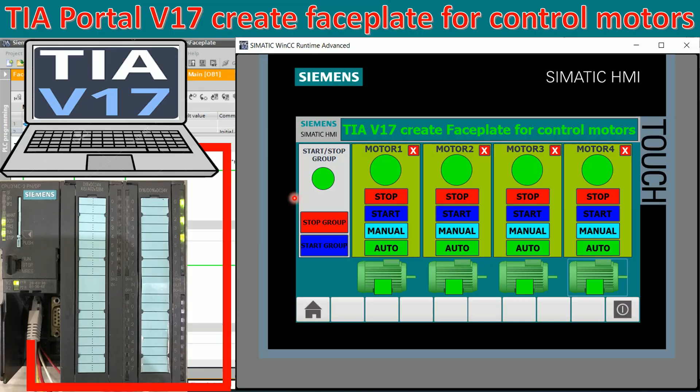Today we will learn how to create the faceplate for controlling motors using the PLC S7-300 CPU 314C2PN/DP.

So here is the faceplate that I already showed the highlight in the previous video. We can start and stop by manual mode one by one, and we also can start and stop the group, meaning start stop using the group.

For example, I push start. It means motor 1 will run, then after a delay, motor 2 will run, then after a delay motor 3 will run, and after that motor 4 will run.

And if we stop the group, motor 4 will stop, then motor 3 will stop, motor 2 will stop, and motor 1 will stop.

We can also select manual and auto mode one by one. If we select manual mode, this pop-up will not show.

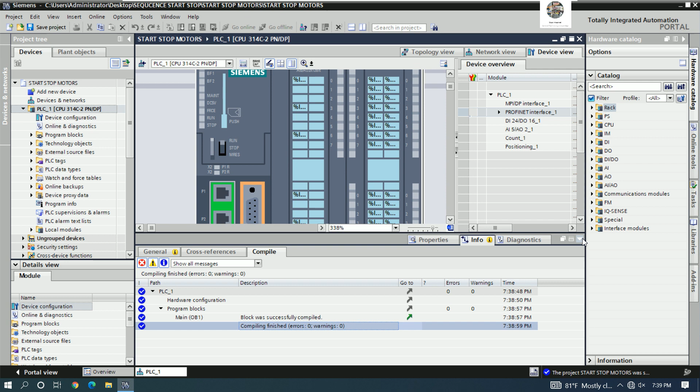Then we can download the hardware configuration to the CPU. I will compile the hardware configuration first before downloading. There is no error, so then we can download it. I will push download to device.

Then choose the Ethernet driver - my Ethernet driver is Intel 82574L gigabit - and then we can push start search to search all devices. It will automatically detect one device.

That device has IP address 192.168.0.1, and then we can click load to load the hardware configuration to the CPU. I will stop all to stop the CPU, and then start the CPU after downloading. Right now the CPU is running.

CPU was started, and now we can go back to our slide. So we need 4 motors: motor 1, motor 2, motor 3, and motor 4. The platform for each motor is the same.

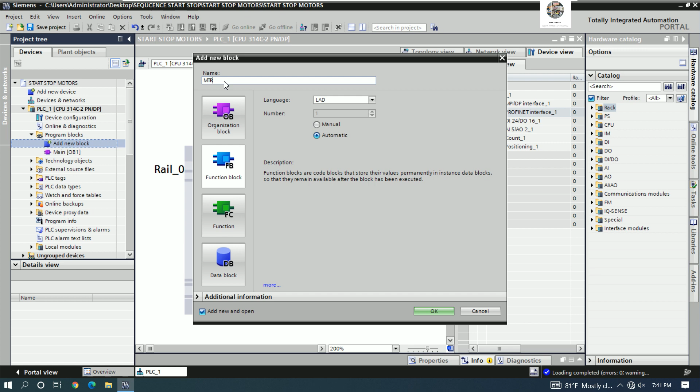For example, I will name it MTRBLK, meaning motor block - MTRBLK, motor block. And then I will choose the ladder language and choose function block, FB, and then click OK.

Okay, we will get the new block here, FB1. And then we need to assign the parameter to the block, right? So we have start, stop, manual, and auto mode, right? So I will assign the input with start. It is the boolean, right? And start command.

Yes, after that, stop. Boolean also, stop command. After that, we have auto and manual mode, right? So I will use only one bit or one point with the auto manual mode.

Then I will use mode select. Yes, mode select. And when mode select, it means that when 1, we have 0 and 1, right? 1, it means auto, and 0, it means manual. 1 auto mode, 0 manual mode. Yes.

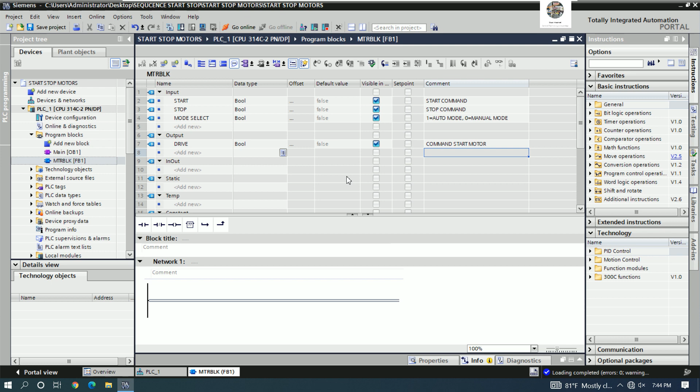Okay, so we have 3 inputs and 1 output. Yes. Then we can create the block interlocking. Yes.

So first I will check the auto and manual mode first. So this one mode manual. So manual mode is 0, right? So I will use NC for manual mode. So when not select, it means manual mode.

Then we can start. Oh, we need to put one more command, right? For start auto. Yes, start auto, so command start auto.

Okay, so we will go back to our network. I will select manual mode and then we can start. And I will put the button stop here and then we can stop. And the output will be drive, right? So I will use output for drive. And I will hold the signal.

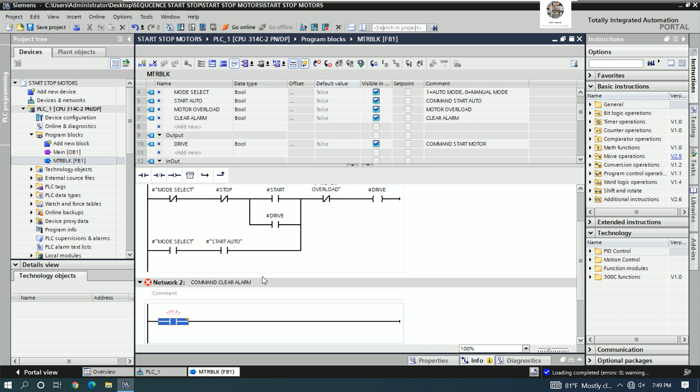So when motor overload, then I will use one more for motor alarm. For output motor alarm. Yes. So I will set the motor alarm. Motor alarm here, and then here I will use motor alarm, yes, to cut off the motor, and then we need to reset the alarm, right?

When the motor is cool, yes, then we need to reset the alarm before we can run. So I will use the reset alarm, and then reset the bit motor alarm. Okay.

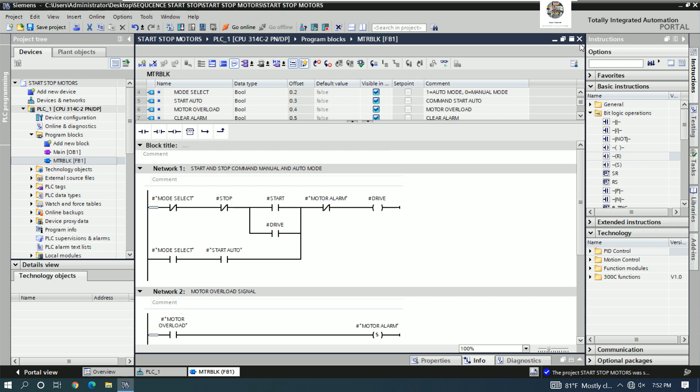So that's all. We can save the project and then compile the block. Okay, so there is no error. Then we can close. And then we can close also. And go to main OB1.

So this one for motor number 1, right? So motor, motor 1 control. Okay, then we can drag and drop here, drag and drop the FB1 to the network, and then we can put motor 1. Yes, it will automatically create the database data block. Yes.

Okay, so instance DB1, and then we have start, stop, mode select, start auto, motor overload, and command clear alarm, right? And we have two outputs. The first one is drive, the second one is motor alarm. Okay, and then

we can put the address, example M0.0 for start manual, M0.1 for stop manual, M0.3 for selection, M0.4 for command start auto. Motor overload, I will use I, right? So let's go to check the I. Go to device configuration to check the input. Yes, here.

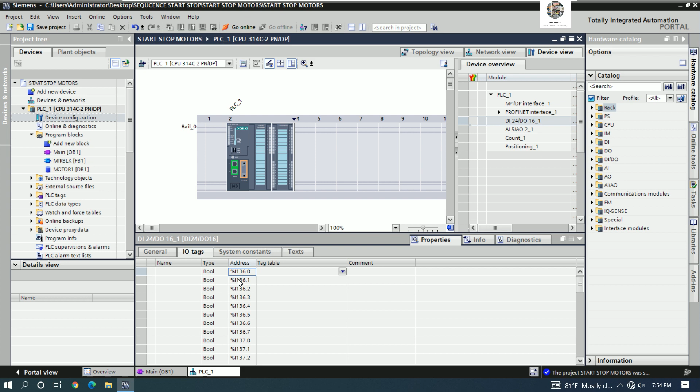IO address, it will start from I136.0, right? So I will mark as motor 1 overload, motor 2 overload, motor 3 overload, motor 4 overload.

Okay, and then for the output we can also remark, yes, here. Example: motor 1 drive, motor 2 drive, motor 3 drive, motor 4 drive, and then motor 1 overload or motor 1 alarm, motor 2 alarm, motor 3 alarm, motor 4 alarm. Yes, then we can compile.

Okay, and we go back to main OB1 again. So this one I will use motor 1 overload. Yes, motor 1 overload. Here it will link automatically because we already created the symbol name, right? And for clear alarm command, I will use M0.5. And this one I can use motor 1 drive. And this one I can use motor 1 alarm. Yes.

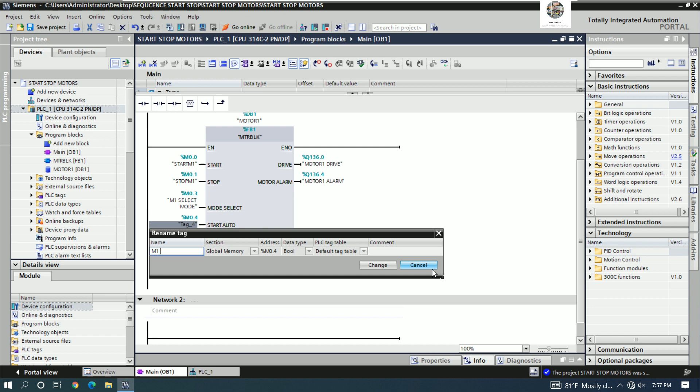And then this one we can rename as start M1. Stop M1. M1 selection, M1 select mode. This one M1 start auto. Okay, and then this one clear alarm M1. Yes, then we can save.

And totally we have 4 motors, right? So we can copy this one, motor number 2, and then we can drag and drop the block to the network, and then put the name motor 2. Yes. Okay, and then I will start from M0.6, M0.7, M1.0, M1.1, motor 2 overload.

Then this one M1.2, this one motor 2 drive, and this one motor 2 alarm. Yes, and then we can rename to be start M2, right? Start M2, stop M2, M2 select mode, M2 start auto, and this one clear alarm M2. Yes.

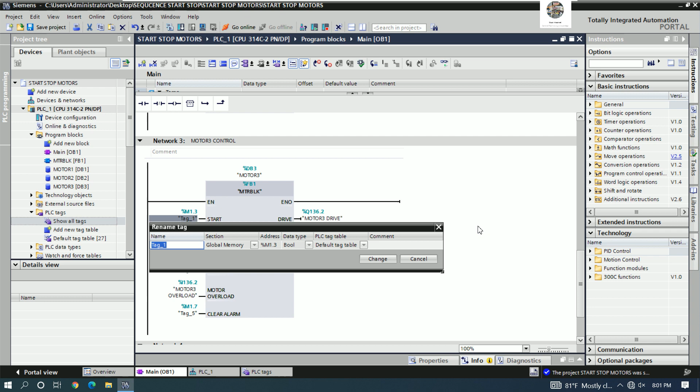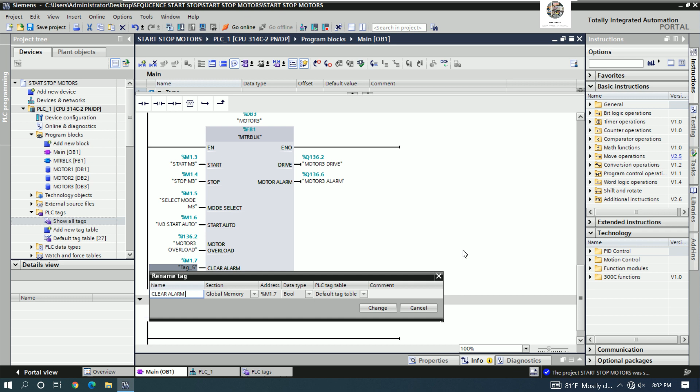So actually we can go to the PLC tags, and then we can also rename here. Example, we can rename here to be the same as the block. But here we can adjust and rename also. I will rename as start M3, stop M3, select mode M3, M3 start auto, and this one clear alarm M3. Yes. And the last one is motor number 4, right?

So we can copy again, paste, and change this one to 4. And then we can drag and drop the block again and put the name motor 4. And then I will start from M2.0, M2.1, M2.2, M2.3, this one motor 4 overload, and this one M2.4 motor 4 drive, and this one motor 4 alarm.

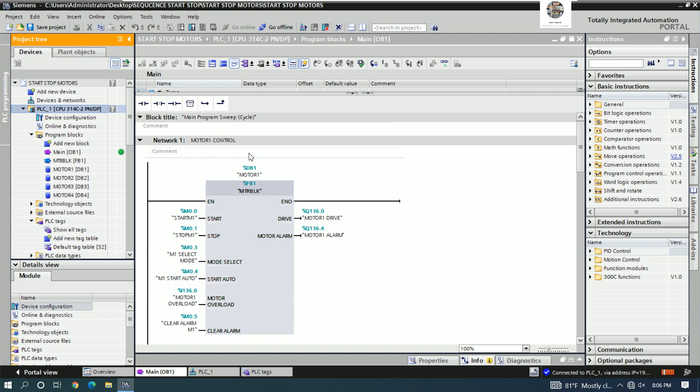And then we can go online to check the status. This one initial, right? I will modify to 0. Put this one to 1 to stop. Okay, so right now we already created the block. Then we go to create the faceplate. I will add a new device to create the HMI. Wait a moment to create the new HMI project, and then we can create the pop-up or faceplate together step by step. I will click finish.

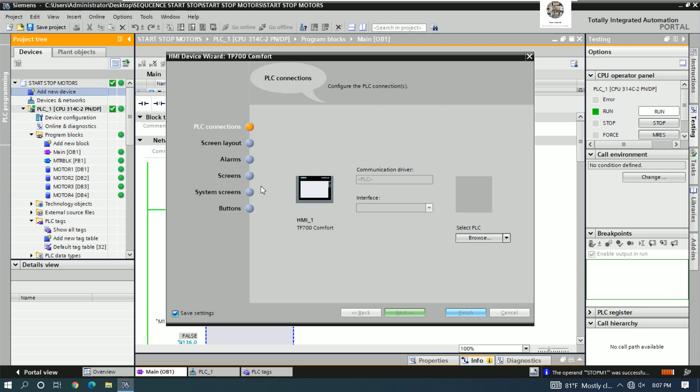Okay, the HMI project is creating. Then I will delete this one, this one, this one, and I will go offline first. After that we can go online again. So here we can change the background of the HMI, and then we have 4 motors, right? So first I will create the push buttons, or we can put a rectangle here, like this, and then we can insert the button.

So I will put start, and then copy for stop, and we have manual, and one more for auto mode, manual mode, and one more for clear alarm. Then I will extend the button like this. And we need to insert the motor, right? So I will insert the motor here.

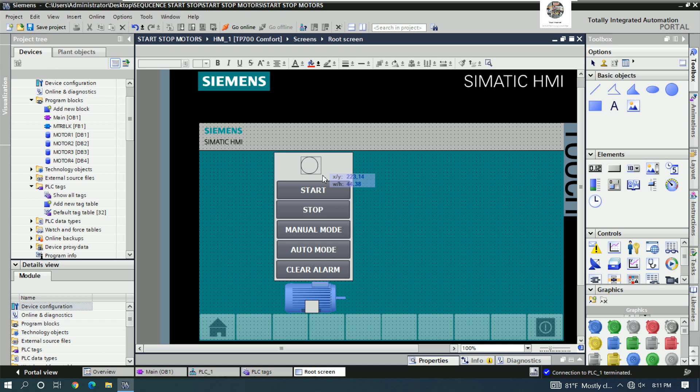And then we also show the status of the motor here. So we go to property and then change this one to be green. Sorry, red. This one should be red also. Yes. And then for the start button, I will select solid and then change to blue. And for the text, I will change to be black.

And for stop, I will change also to solid and then change to red, and this one should be black. For mode select, I will use this color. This one also, I will choose this color. Yes. And for command clear alarm, I will use this color. Okay.

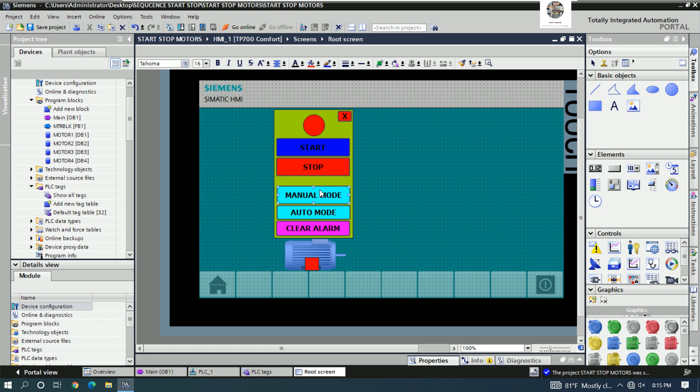And then we need to put the name of the motor, right? So the name of the motor I will put here. Motor 1, motor 2. Okay, maybe I will adjust this button to be smaller, because the space is very small, right? Okay, maybe like this is okay. Then I will put the name of the motor to be motor 1. Okay, motor 1 here.

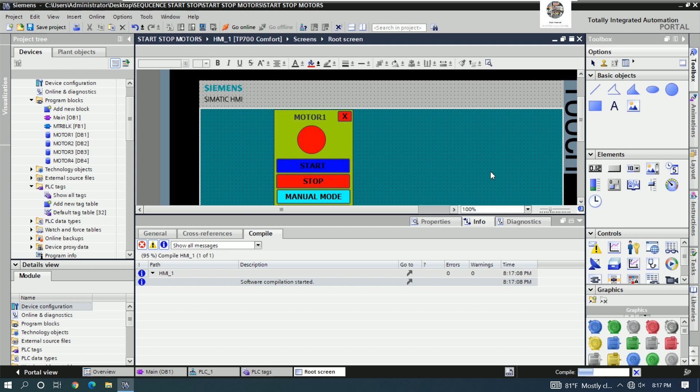Then we can adjust the layout. Align to be center, yes. And then here we can adjust to be bigger. Okay, so for the screen we can design another style that we want, yes. So I will focus only on configuration for the push button and HMI, yes. Okay, like this. Then we can simulate to check the screen a little bit, if it's okay or not. Okay, so that's good for push buttons and for the screen, yes.

And the concept is when we click here, it needs to show this pop up, right? So I will use one more button, yes, and then put like this, and then I will delete this one, yes. Okay, and then go to property and then go to fill and then choose transparent, yes. When we put like this, it means that here, yes. So here we can also adjust to 0, yes.

And for this one, actually we can adjust to be a little bit bigger than the motor. This one I will choose 0, yes. Okay, so we can set up only one motor for test first, yes. Okay, so let's go to create the tag, HMI tag.

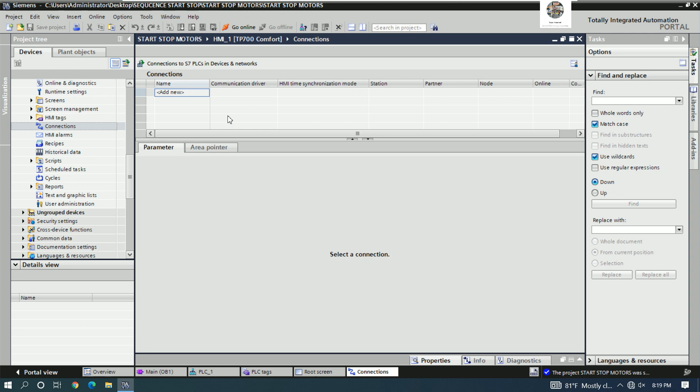But before going to create the HMI tag, let's create the connection. PLC 1, and choose the driver as S7-300/400 station, and then choose Ethernet, and for the IP address 192.168.0.253, 192.168.0.1. It is the IP address of the PLC, and here is the IP address of my PC. We can also check IP config, yes, 192.168.0.253, and then go to HMI tag, yes.

Then we can create the tag. So we have motor 1, start M1, stop M1, yes. Actually we can copy and paste from here, yes. So let's copy and then paste. Copy. And then we can also create one by one. Okay, let's create one by one.

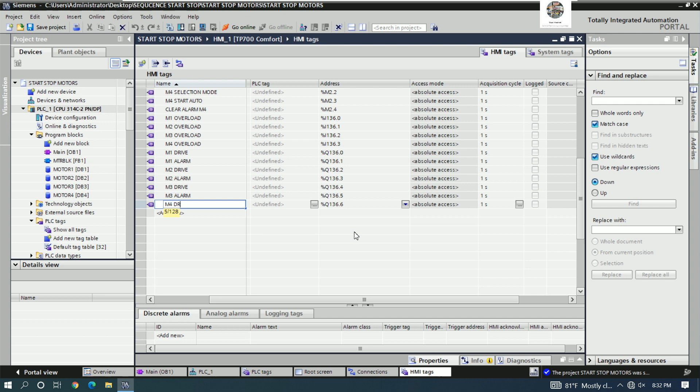Q136.0, M1 drive, M1 alarm. Yes, so M1 drive will start from Q136.0, M1 alarm, M2 drive, M2 alarm, M3 drive, M3 alarm, M4 drive, M4 alarm. Yes, so until Q136.7, right? So let's check to confirm. Yes, so that's correct,

and then we can save and compile. Okay, there is no error, right? Then we can go to create the faceplate. Yes, go to our screen and then go to configure the button. So the first one I will configure the start button, so right click and then go to events, go to press, and I will choose the set bit while key pressed.

Okay, so we will configure the start button by using the set bit while key pressed, and then we can drag and drop the tag for start M1 here. Yes, and for the stop we also use the press and then choose the set bit while key pressed and then choose the stop M1. Yes, and for the manual and auto mode, it means that we can select, right?

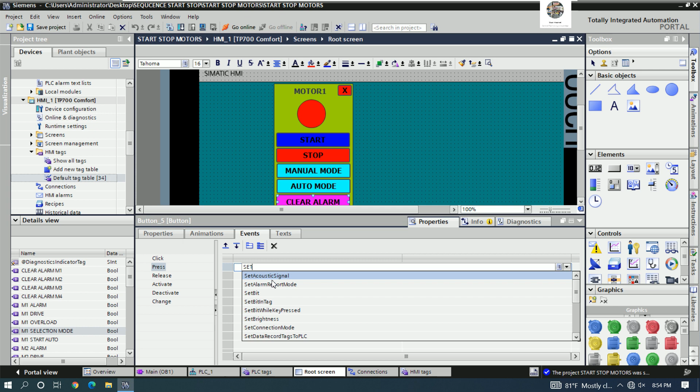And then for this mode we can also choose the color appearance, and then when condition 0 I will change to green. Yes, and then clear the alarm, right? To clear the alarm, we can use the event and then choose press, so set bit while key pressed and then clear alarm M1. Yes,

and we need to show the status of motor 1. So we can go to color animation, insert the new appearance, and then go to M1 drive. Choose the condition 1 and change the color to be green, and this one also. So the normal condition is red, so I will choose the color animation, change M1 drive to 1 and then change to the green color. Yes, and for this object I will put the same position.

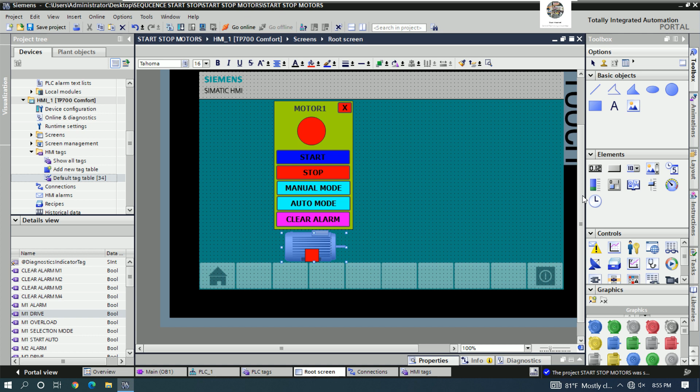So that's all, and then we can configure this one later, so we can simulate first. So I will go online with this one and then go to OB1, online. Yes, and we can simulate here. Okay, so here is the mode, sorry, manual mode, right? So we can start the motor.

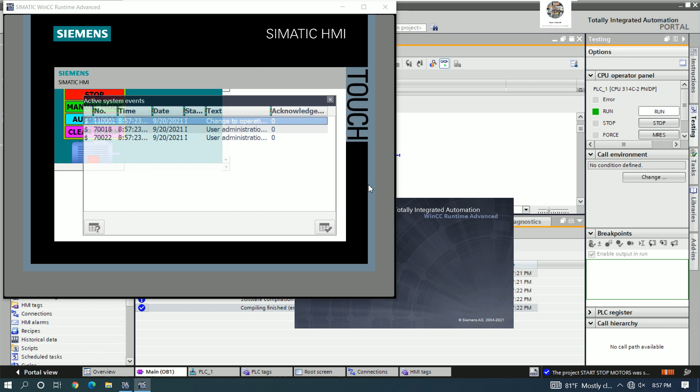We need to set the PG/PC interface. So I will go to control panel and then go to set the PG/PC interface. Go to S7 online Step 7 and then choose the correct driver that we already connected, right? And then let's simulate again. Okay, the connection is working. Then we can select and see the condition together before going to step 2. So mode manual, mode auto, mode manual.

Oh, this one should be reset, right? So we can go to change the screen selection. For this one we can go to events and then choose the press and then choose the reset bit, M1 selection mode, yes. Then we can save and then simulate again.

Okay, and then go to OB1 again to see the condition. Okay, I will try to select again. Let's see this one. Yeah, fault. So we can start the motor. Yes, motor is running, so the condition will change to green. I will stop the motor, start again, stop again. Yes, auto mode. Yes, let's see, this bit works.

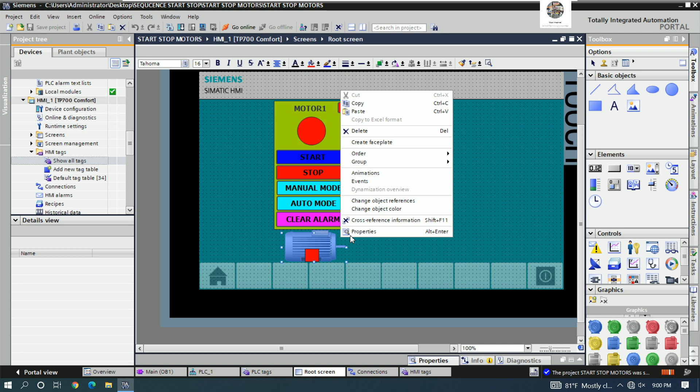And then let's go back to our screen to configure the clear alarm, right? So clear alarm we already set, right? Okay, and we need to configure this one. When we don't click this one, it will not pop up, right? So we can go to events, go to press,

and then go to set bit, and then we can create the new internal tag. Yes, I will add a new tag. Example, tag name M1. Yes, and choose the boolean here. Yes, so the internal tag is M1.

Then I will configure this one. Go to events, then go to press. I will reset bit M1. Yes, and for all of this pop-up page, I will show it only when I press this area, right? Press the M1 area. So we can hide it, yeah, by using the animation.

Go to add new animations, go to visibility, and then we can choose tag M1 that we already created as an internal tag, and choose the range from 0 to 0, and then use invisible. Yes, so we can change all the same. Yes, go to animation, add new visibility, choose M1, and then change from 0 to 0, invisible.

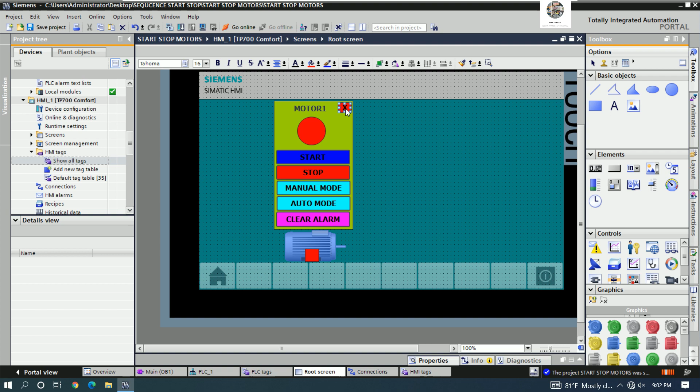This one also. Go to property, add new visibility, M1, 0 to 0, invisible. Yes, this one also. Add new visibility, M1, 0 to 0, invisible. Yes, we can do the same procedure. From 0 to 0. M1 from 0 to 0. We don't need to show the status, right? M2, sorry, M1.

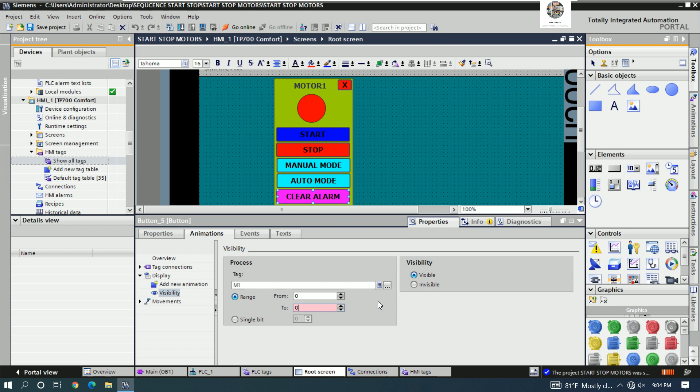This button also, create the new visibility M1, change to 0, invisible. Visibility M1 from 0 to 0, invisible. Yes, so that's all. Then we can test the screen again, simulation.

So let's see, it doesn't show the status, right? So when I push here, yeah, it will show, and click here, close. Yes, and then we can start, stop, yeah, auto, manual mode, yes, clear the alarm, yes, start, and then we can close. Okay, so we can do the same from motor 1 to motor 2, motor 3, and motor 4.

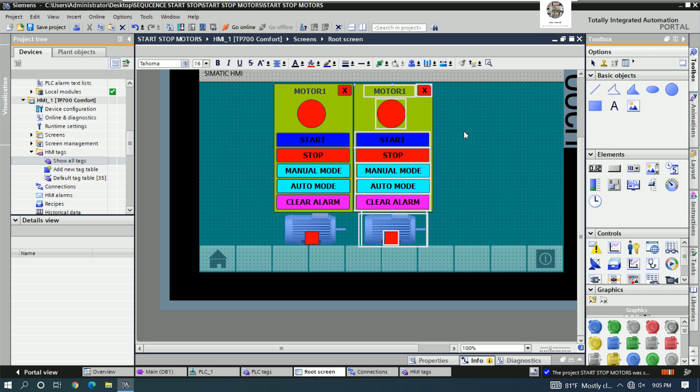Yes, so this one is very easy, we can copy. Okay, right click, copy, right click, paste, and we can drag and drop. Yes, and we can right click, paste, and one more, right click and paste, right? Maybe we can zoom a little bit. Maybe delete this one first, then we can drag and drop. We can adjust like this. So we need to put the place for the start stop group also, right? So I will copy again, or we can paste again.

Okay, and then we can adjust a little bit more. Multi-selection, yes. Okay, like this. We'll adjust a little bit for the rectangle. Okay, maybe like this, okay, right?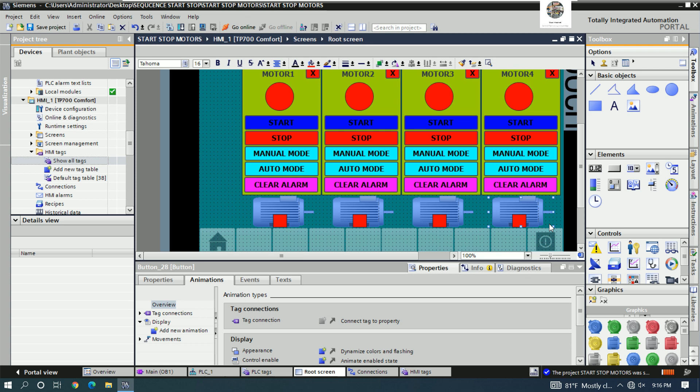Okay. Then go to the top. This one visibility should be changed to M4. And this one should go to M4. Events, change to M4. For this one, we already changed, right? Okay, and then we can change the background to be M4. The status I will change to M4 also. Event, no event, right? But color animation we have appearance also. Change to M4 drive. Yes. This one M3, M2, M1, right? Okay, that's correct.

And then we can go to start button, visibility, change to M4, events, start M4, right? Stop also stop M4. For animation, we can change this one to M4. Manual mode, we can change to M4. For the appearance, we also change to M4 selection. And event, we can go and then change this one to M4. For auto mode, change this one to M4. And then change the color animation to be M4. Visibility, change to M4 also.

This one does not work, right? Oh, this one is confused. So we can go to check the events again for motor M2. Start M2, go to events. Start M2. Stop M2. That's correct, right? So we can go to check on the OB1. Yes. Why does it not work? Motor M2. Motor M2 is already on, right? But the condition is not on. So we need to check the color animation. I will try to stop. It stops. Start again. It starts, right?

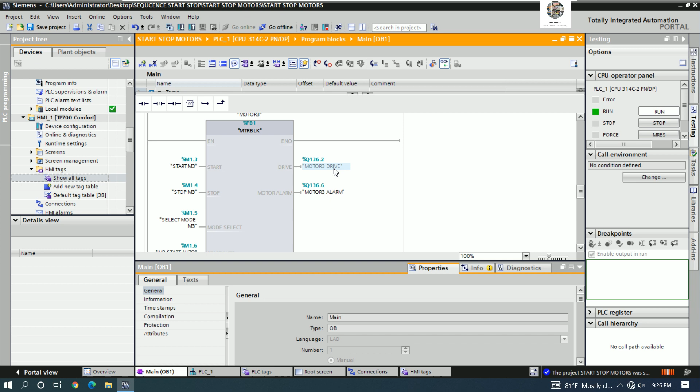So let's check Q136.1. Yes. Go to root screen, then check the color animation. This one should be changed to M2 drive, right? M2 drive already created, but we need to see the tag, right? M2 drive. This one. Oh, M2 drive, the address is not correct, right? M1 drive 136.0, 136.1 M2 drive. Okay, let's check the address again. Q2, this one. Motor 2, right? Q136.1. Okay, let's check the HMI tag.

This one should be .1, right? M1 drive .0, M2 drive .1, M3 drive .2, M4 drive .3, M1 alarm .4, right? Yes, here Q136.4. Sorry, I confused here. So this one .4, M2 alarm .5, M3 alarm .6, M4 alarm .7, right?

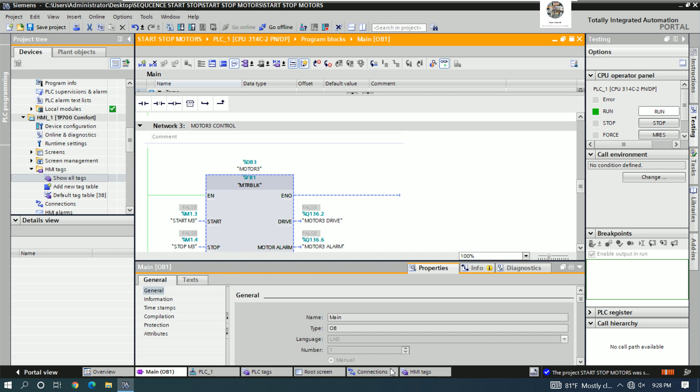M4 alarm .7, M3 alarm .6. Okay, so .0, .1, .2, .4, .5, .6, .7. Okay, that's correct. And then we can simulate again. So let's go check motor 2 again, right here. Okay, the condition is okay because I corrected the address. Yes, sorry. Then we can start M3, M4 also start, right? Then we can stop one by one. And let's see the output on the PLC is working. I will show the status on the PLC when I push the control on the HMI.

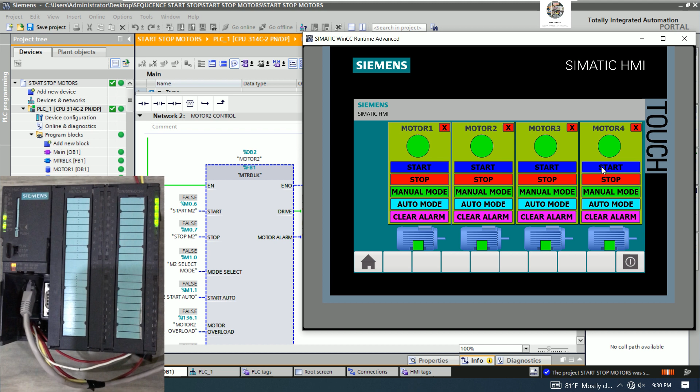So this is just manual mode. Then we can create the auto mode. I will close the simulation and go offline first, and then we can create the automatic mode, when we start the group. When we start the group, the motor will start step by step, from motor 1 to motor 4, and when stop, from motor 4 to motor 1.

I will go to the root screen and put the title here. Change the color, go to property, I will change this color, insert the text, create TIA Portal version 17, create FB, function block for control motors, control for motors, and then we can go to layout and check this one, and I will change the color to be yellow like this.

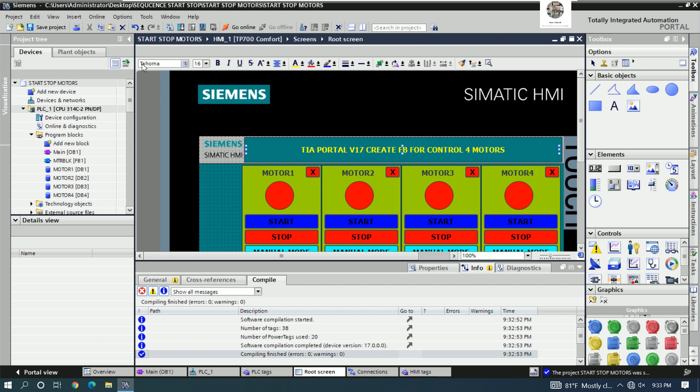Then okay, I will stop the motor first. I will stop first. Maybe I will put this one to be 17.

So we will create the group for start and stop, right? Okay, I will create the new network. Create the group start and stop for all motors, step by step.

So for the group, we need to select all the motors to be automatic mode. I will choose the NO for 4 motors, and then one command for automatic mode selection. So first I will copy from this one, yeah, we can copy and then paste here. This one also copy and paste here, we need to AND, right? Because we have 4 motors. So if we would like to start with the group, we must select all the motors to be automatic mode.

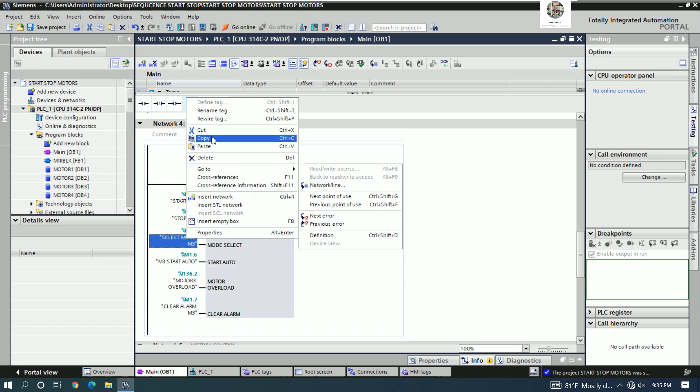So I will copy, paste, and also copy, paste. So motor 1, motor 2, motor 3, motor 4, all must be selected to auto mode. And then I will generate M10.0 - this one for automatic mode selection, right? All motors auto.

Post auto select. After that, we need to create the button for start and stop group, right? So I will add a new network. This one should be group selection.

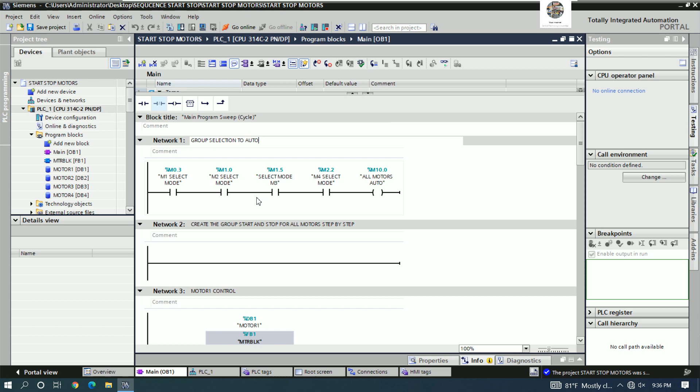Group selection to automatic mode. And then I will create more for stop and start the group, right?

So when all motors select to automatic mode, I will copy and then paste here, and then I have start group, example M10.1, M10.2, M10.3. Then I have stop group. And I have also start group.

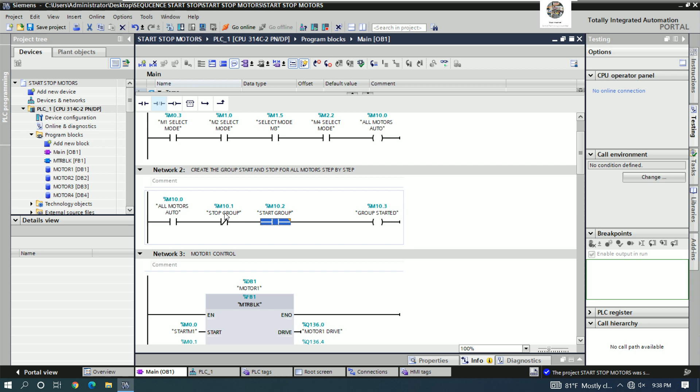And then I have group started. And I will hold the signal when group started. Sorry, I will choose this one. And then I will hold the signal when group was started. So copy and then paste.

And when group was started, I need to start motor M1. So I will delay a little bit when group started, because we need to connect to the alarm - the siren - yeah, to let the human know the group is running, the machine is running. So I can insert one for timer.

So when group is running, I will insert - copy and then paste, and I will insert the timer. So TON, and example timer 1. I will delay around 5 seconds, so T-sharp 5 seconds.

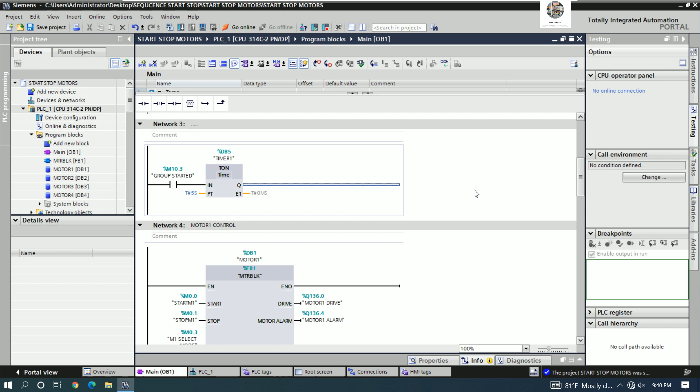So I will turn on. Turn on M10.4. And then insert one more network.

So when M10.4 is on, I will hold the signal. Yes, I will hold the signal. So I need to put M10.5 for hold the signal.

And then actually we can copy from here for start auto. Yes, we can copy from here and paste here, or we can paste here. So when timer is turned on, this one is turned on, this one is turned on also, and then copy this one to paste here, sorry, paste here for motor 1.

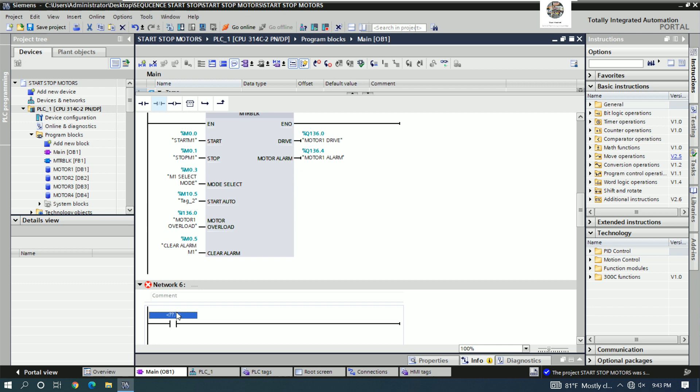And for motor number 2 I will insert one more network, and then I can use command from here, but it should be select to manual first, sorry, auto mode first, right? Okay, then I can use one more and then interlock with the group selection. Yes, so copy and then paste here.

And I need to hold the signal also, sorry, this one is turned on, then I will let the timer, yes, I will let the timer be turned on.

This one we can put the timer, right? Okay, I will hold the signal. I will put the timer 2, right? Sorry, TON, timer 2.

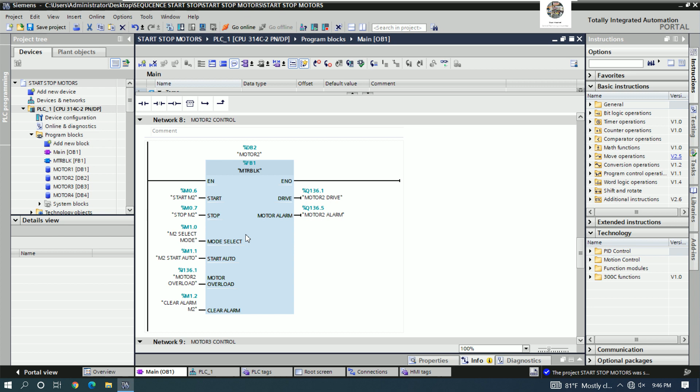This one also, and then I will hold the signal, hold by this bit, right? Okay, so this one I will change, yeah, copy and then change this one to be start auto, right? M2, and we can do the same as procedure.

Insert the network, and then yes, auto mode selection, right? So copy and paste, and also use command from here, right? So insert and then copy and paste, yes.

And we need to turn on the timer, right? So let me turn on the timer. So TON and then timer 3. I will delay 10 seconds also, yes.

Okay, and then this one I will use command from here, copy and paste, and we need to insert one more network, yes. So this one turn on, then I will turn on this one and choose one more for M10.7, right? So M10.7.

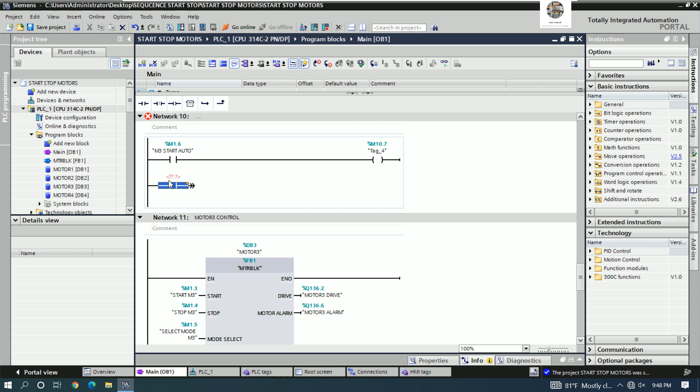And then I will hold the signal also, yes. Hold the signal, copy and paste, and then I will paste here also, yes. Okay, so this one will start motor 3, and for motor 3 I will insert one more network and then copy.

From here, automatic selection, paste here, and then insert here, insert command from motor 3.

And then turn on the power, turn on the timer, TON, timer 4, yes, this one timer 3, right? And this one timer 4, then delay time 10 seconds also.

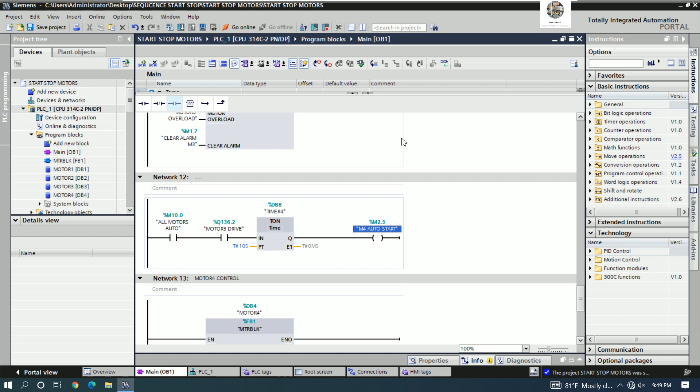And I will turn on this one, copy this one, and then I will insert one more network for hold the signal, right?

Hold the signal by this one. So this one I will choose M11.0, right? M11.0. This one also M11.0 because it holds the signal, right?

And then we can copy from M11.0 to control the start auto for motor 4. Yes. So that's all for group start.

Then we can test for group start first. Okay, so first we need to show the status of group selection, and then we need to create the HMI for group stop and group start, right? Okay, so I will download the logic to the PLC first.

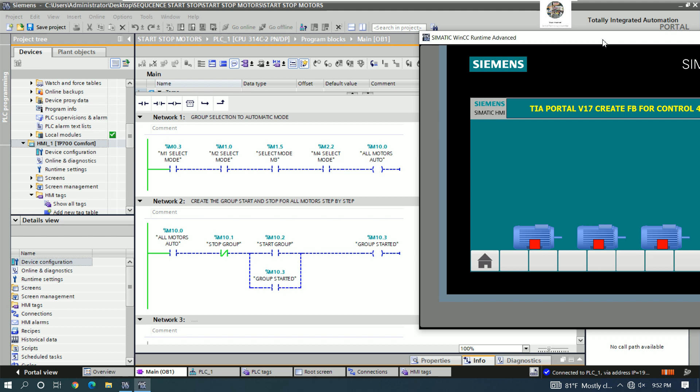Okay, we can select one by one to automatic mode. And let's see, this bit will turn on, right? I will select to automatic mode. Yes, yes, so we need to show the condition here. The mode selection is okay, right? Okay.

So we can go to create the HMI. So first let's go to the tags. We need to create more tags, right? So the first one is group status, group selection status, right? M10.0.

Group selected. I will use the PLC device, and then the address will start from M10.0, and change this one to 100 millisec.

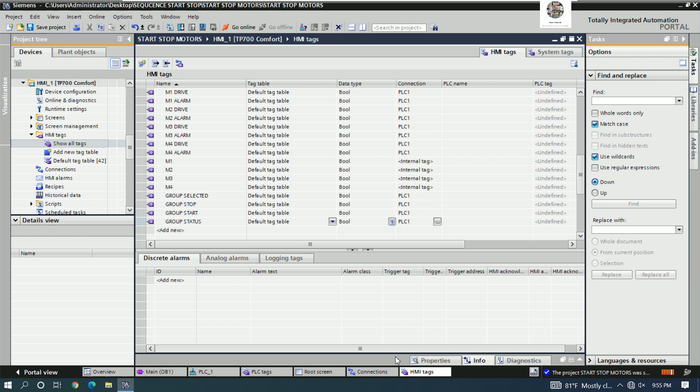Yes, then we can compile the tags. Okay, there is no error occurring, right? Then we can go to the root screen.

Then we can create more faceplate here. I will create with the small one for start and stop group. Yes. Because we have small space, right?

Okay, like this, and I will change the color to be, go to property, go to appearance, change to this color, and then we can copy from here, paste, to close the faceplate or close the pop-up, right? And then I will choose the button for stop.

And then copy for start. So we have start and stop, right, for group. Actually we can put like this, the same as this one, and then we can adjust. Okay, so this one should be start.

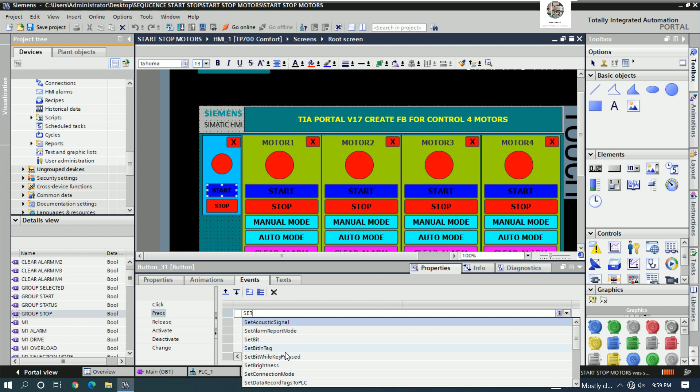And for start group start I will insert the function also. So SetBitWhileKeyPressed and choose the group start, sorry, this one.

And for group status I will go to animation, new color animation, choose appearance, and then group status, and I will change to, when status 1 I will change to green. Yes,

and we need to show only when all the motors are selected to auto mode, right? So we have group selection here. Yes, so this one I will configure with the color animation, go to new, and then choose visibility, right? And then go to group

selected from 0 to 0, and then choose invisible. This one also new, visibility group selected 0 to 0, invisible. This one also new, visibility, and then this one 0 to 0, invisible.

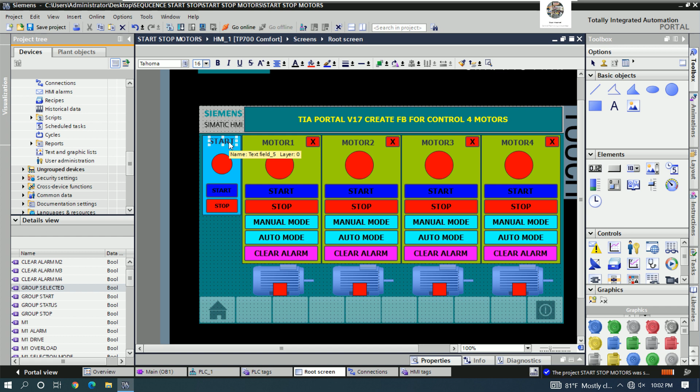So I will reset the bit. Normally we no need to close, right? This one no need to close, because when we select the manual mode, this one should be closed, right? Okay, no need. So I will put only start, stop group, right?

Can write group. Go to property, go to layout, and then uncheck this one. Change this one to center, and then I will adjust font to be 15. Then the color text we can change to be this color. Yes.

Then we can save, and we can simulate. Yes. Okay. Oh, this one should be hidden also, right? I will hide it. Okay. Go to color animation, and then go to new visibility, 0 to 0, invisible. Save again, and then simulate again. Yes.

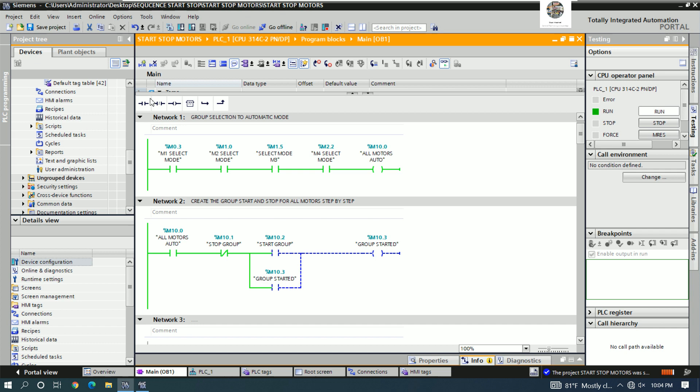Okay, let's start the group, and then we need to create the stop group also. Yes. So I will go to the OB1, and then simulate. Yes. Okay, so right now the group is ready to start, right? Because all the motors are already selected to auto mode.

So if I select one motor to manual mode, let's see, we cannot start, right? Because we already configured to hide the start group, since all motors must be selected to auto mode. Yes. So we try to select the auto mode, then group will pop up. Yeah. If one motor is selected to manual, we cannot start group, right? Okay.

So I will try to start the group. Yes, group is running. So wait timer for start motor number 1. Okay, motor number 1 is running. Wait for start motor number 2. Running for motor number 2. Wait timer for start motor number 3. Running.

Motor number 4 is running also, right? So for start group, we already put the correct function. Yes, let me try to select and configure for stop group. Yes.

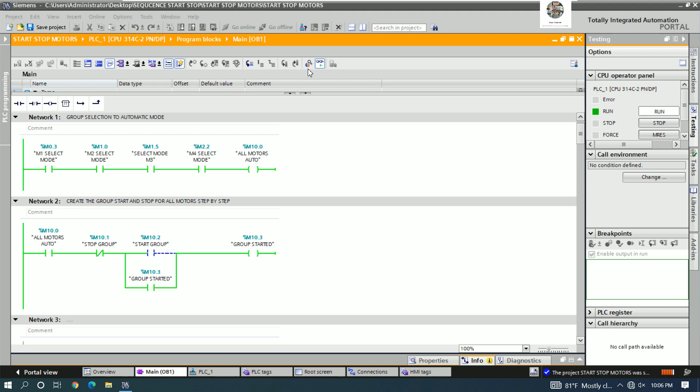So I will close first, and then we can go offline. Okay, so we will create the program for stop groups from motor 4 to motor 3 to motor 2 and to motor 1, right? So we can,

okay, I will comment this little bit for start motor 1 with auto mode. Yes, and this one we can copy and then paste here. Start motor 2 with automatic mode. This one start motor 3 with automatic mode, and this one start motor 4 for automatic mode, right? Then we need to create the stop group command, right?

Stop group command. Okay, so for stop group command we need to use this button, right? So I will copy. When we stop group, I will paste here and then change to normally open. So when stop group, I will set the coil, yes, set one coil. This is for command stop group.

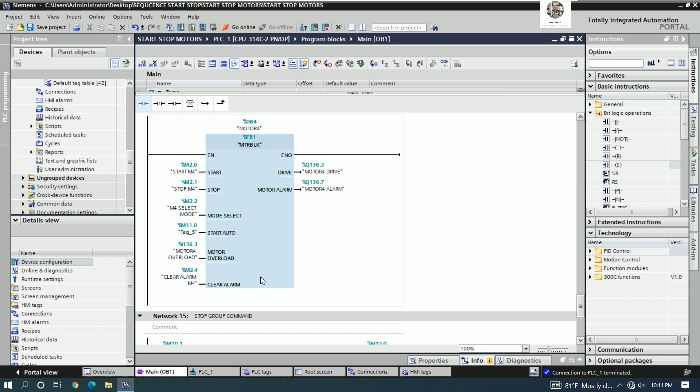And then I will use this one for hold the timer, right? So first, when we stop group, we need the timer a little bit more, right? Okay, I will use TON. So timer 5. Okay, I will delay time around 5 seconds also. So T sharp 5 seconds. Then I will stop the motor number 4, right?

So when the timer is turned on, I will turn on one more bit, M12.1, and then I will copy to turn off this one, right? Turn off this one, and then this one will turn off. Yes.

And then I will delay time more. Yes. So I will choose the same command stop, and then choose one more timer. So timer 5, 6, right? I will delay 10 seconds.

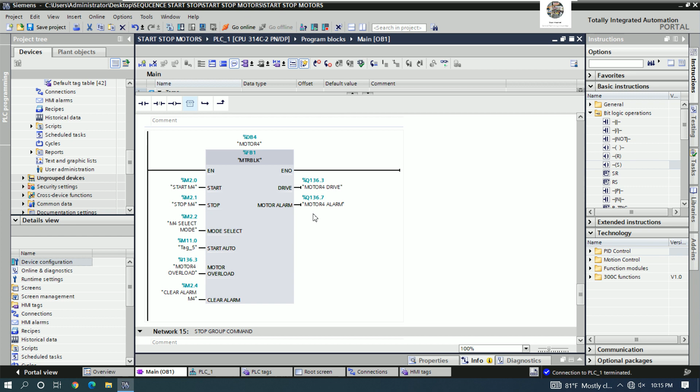Yes. Then I will insert one more bit. So M12.1, sorry, M12.2, and then I will turn on this one to let the M3 be turned off, right? Okay.

And one more, we can copy and paste and insert one more timer, TON, timer 7, T#10 seconds, and we insert one more, M12.3, copy and then paste here for stop motor number 2, yes.

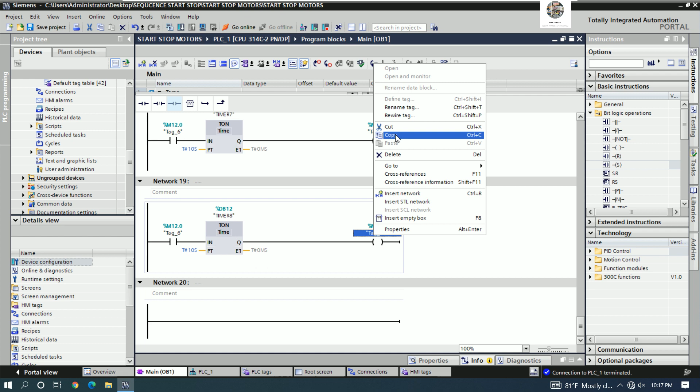And one more, copy and paste and insert one more timer. So timer 8, I will use T#10 seconds, and then M12.4, okay, copy and go to cut the motor M1, right here, yeah, sorry.

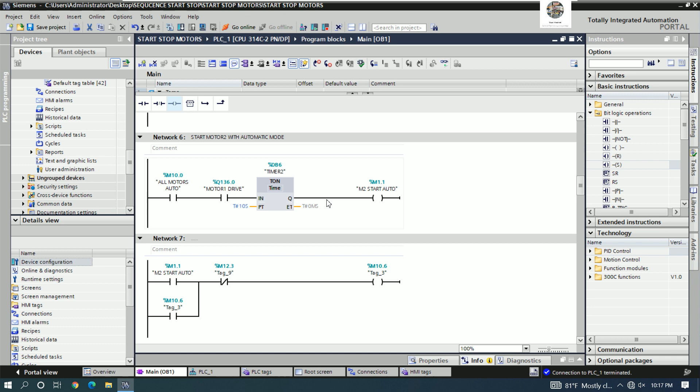Okay. And then when the timer is turned on, I will reset all, yes, reset this one also. I will reset all output. So when M12.4 is turned on, then I will reset the command stop, right? So I will reset the command stop here. Okay.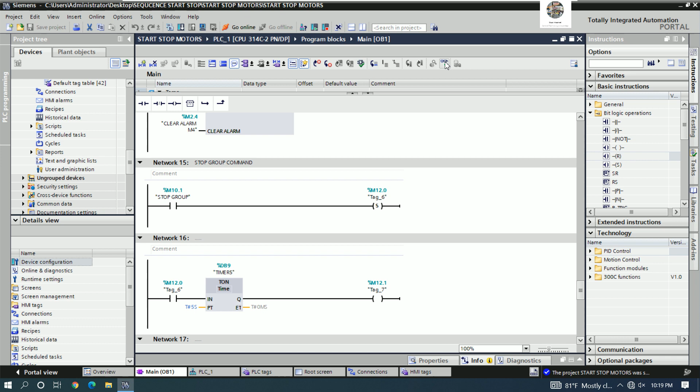Then we can test together. Yes, I will download this logic to the PLC and then we can try to test together. If any mistake, we can revise. Yes. So we can go online. Okay. Then we try to stop group. Okay, let's try to stop group.

Wait the timer for stop M4, right? And then wait the timer for stop M3. Oh, this one is not yet correct, right? So we need to revise the logic again. It should stop step by step. Hold the signal, yes. Okay, right now it stopped together with motor 1, 2 and 3, right? So we need to adjust the timer. Yes, I will adjust the timer here.

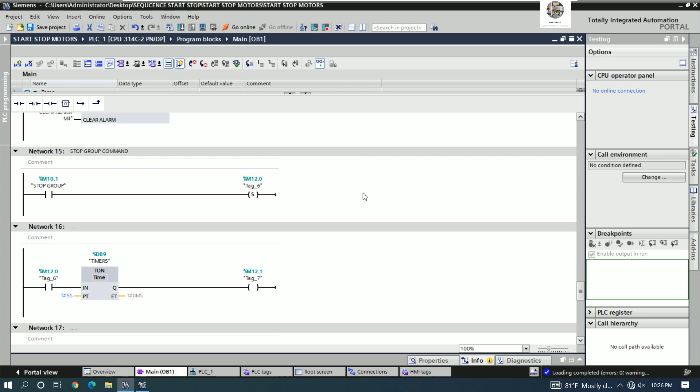For command stop, motor 1. This one I will change to 15. And this one I will change to 30 seconds. This one I will change to 45 seconds. Yes. And then let's save and then download to PLC again, and let's try to test together again. Because the timer should not be the same, right? Because we use timer on.

Okay. Let's try to start again. Okay, we start group again. Motor 1 running. Motor 2 running. Motor 3 running. And motor 4 is running, right? Then we try to stop.

If we push stop, okay, the command stop will run, then set this coil. Yes, I will explain. It will set this one, right? And the timer will count, yes. So if I push stop, this one will set. Okay, red stop. Okay, let's see here it is set. Then the timer will work. And then wait the timer for stop for motor number 3.

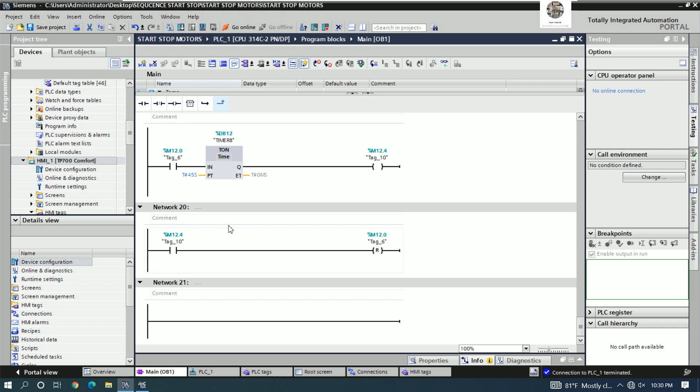This one command stop group for motor number 2, this one motor number 3, and this one for motor number 4, yes, and this one for reset, command reset the sequence, right? Sequentially, yes. Okay, so that's all, and then we can download to the CPU again, and I will show the status on the PLC also when we start and stop. Yes.

So we can go online. Yes, wait for online. So right now the motors are running, right? Then I will show the status on the PLC.

So right now the output is turned on for motor number 1, number 2, number 3, and number 4, right? So if we try to stop group, and then let's see the status together. Motor number 4 was stopped. Wait timer for stop motor number 3. Yeah, number 3 stopped.

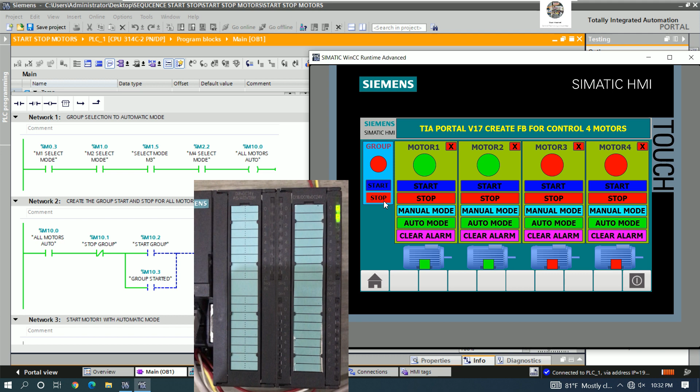Number 3 was stopped. Then wait timer for stop motor number 2. Yeah, number 2 was stopped. Yes. And wait timer for stop number 1. Okay. So right now motor number 1 was stopped also. Then we can try to start again. Okay, if I push start, wait timer for start. Okay, motor start.

So we can connect the cable from the output to control the relay. Then we can connect from relay to contactor. Then connect from contactor to the motor. Yes. So it's very easy to wire. So finish, start, finish. Then I will try to stop again. Okay, stop.

For the timer, if we would like it slow or fast, we can adjust from start to stop, right? So we can adjust the timer to match our process. If the process is fast, we can adjust fast. If the process is slow, we can adjust start and stop to be slow. Yes. So it will stop. Okay, it will stop all. Yes, right now it stopped all. So it worked perfectly for this program.

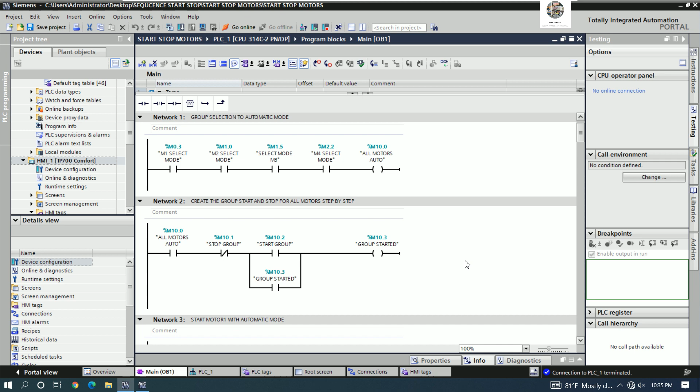And if we would like to add more for protection, for emergency stop and other protection, we can add more. Yes. For example, I will put the emergency here, so we can put the button here. Yes, I will show everyone. So right now I will put an emergency stop. So I need to create one more for emergency stop. So I will put the emergency stop, for example M30.0, emergency stop.

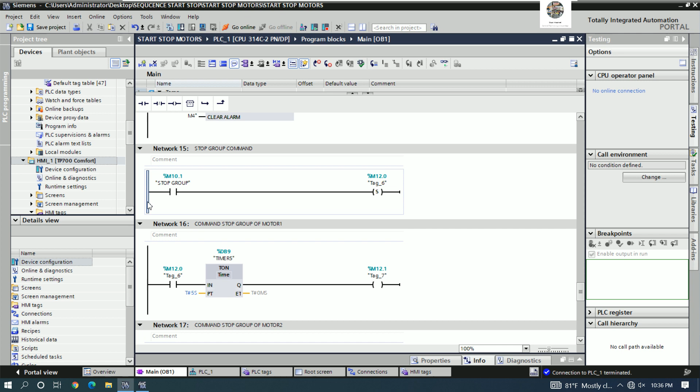Copy. Then we can try to stop all. We can try to stop all networks. Yes. We can add it for all networks. This one should be stopped also, right? Okay, this one is stopped already. Then when we push the emergency stop, we can cut all this. So this motor cannot run, right? Okay, emergency stop. We can save and compile. And then I will download to the PLC again.

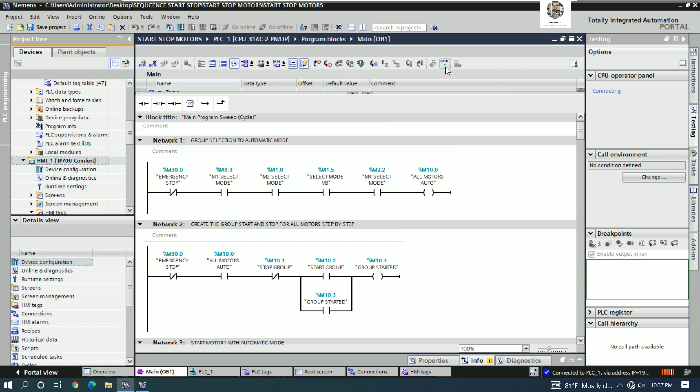Okay, then we can create the new tag for emergency stop. Emergency stop, M30.0, right? M30.0. Then we can go create the screen for emergency stop. I will put the button also. EM stop. So I will choose the color. I will choose the red color for EM stop.

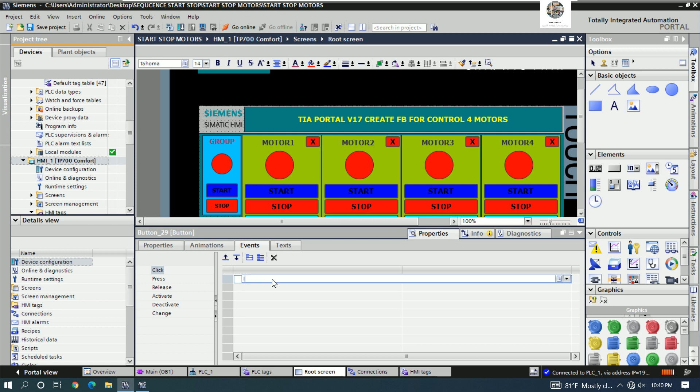Sorry, this one should be black. Yes. And then I will change the color, change the size to be 13 or 14. Yes, 13 or 14. Then I will go to events, go to press, or go to click, and then choose invert bit, emergency stop, right?

And then for color animation, when we turn on the emergency stop, I will change the color to blink. Yes, blinking this color means emergency stop. Then we can try the simulation. Okay, so let's go see the OB1. So when we push the emergency stop, let me pull the emergency stop. Let's see, all circuits were cut by the emergency stop, so we cannot start and stop anything. Yeah, it doesn't work. We cannot do anything.

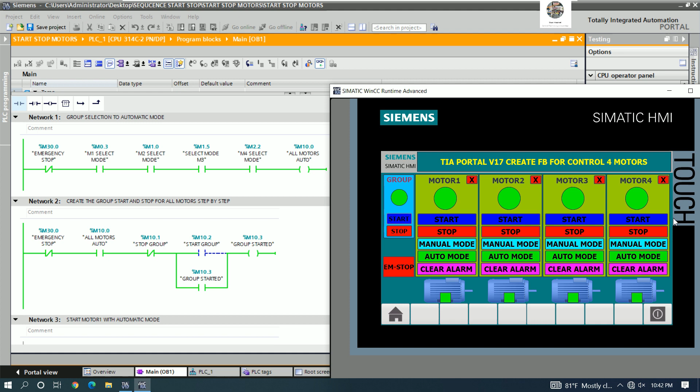Yes. So we need to put the emergency stop back. Yes. Then we can start. If we push stop, it will stop also, right? Okay, I will test the emergency stop. Okay, so right now all motors are running. Then we can emergency stop. It should stop, right? Okay, let me put it like this. It doesn't stop right now.

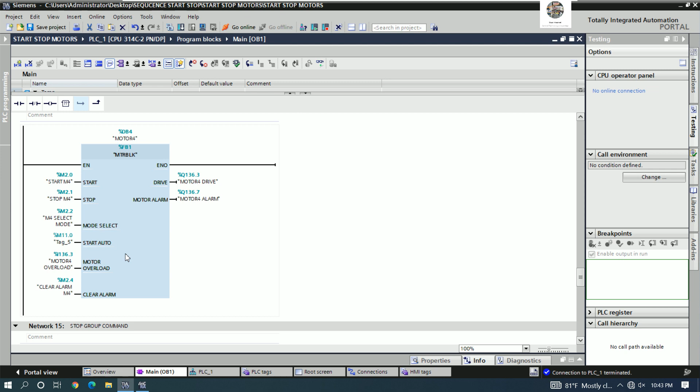I will put it like this. No need to cut the block, right? Then we can cut only when emergency stop. Then I will reset all outputs, right? Reset the outputs that control the motors. So reset Q136.0.

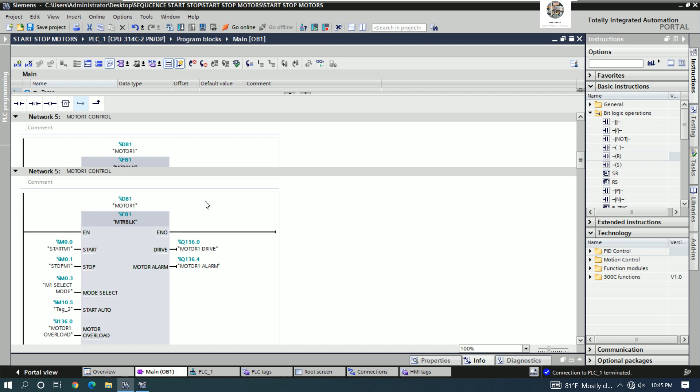Q136.1, Q136.2, and Q136.3. Yes, I will reset the output here, here, here, and reset here. Okay, so let's compile the program and then download to the CPU again, and we will try to test again.

Okay, right now all motors are stopped. Then we can try to test again. We start group again. Okay, motor 1 runs. Motor 2 runs. Motor 3 runs. Motor 4 runs. Then we try to push the emergency stop. Yes. So all motors should be stopped like this. Yes. So that's correct.

Okay, so this is just an example of how to create the function block and create the sequence start and stop of the group of motors using TIA Portal version 17. Yes.